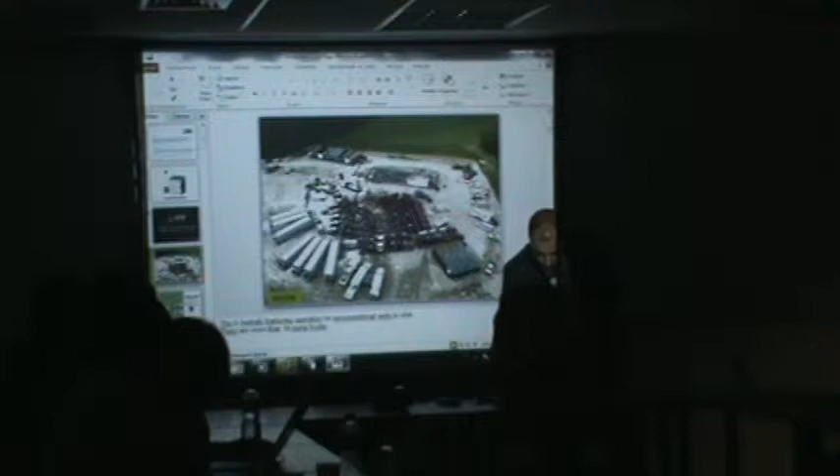So let's move on. This is a picture - I will turn on the lights just after this. This is a picture of unconventional operations. We don't have a drill rig here; this is the phase of fracturing. You can see these white trucks that carry water, and these red trucks that are the pressure pumps. Here is the well, and water is injected inside this well deep into the subsoil, and then the fracturing occurs. This is like a pool where you put the flow back of the well - the water that you injected. Part of this water stays in the subsoil, and part returns to the surface, so you have to collect and treat this water. This is the picture of an unconventional operation. In a few minutes I will talk about the comparison of conventional and unconventional operations, and I want to play a movie just to give an idea of what conventional operations mean.

This is available on the...

In order to maximize the production potential of the well, the shale formation will be hydraulically fractured.

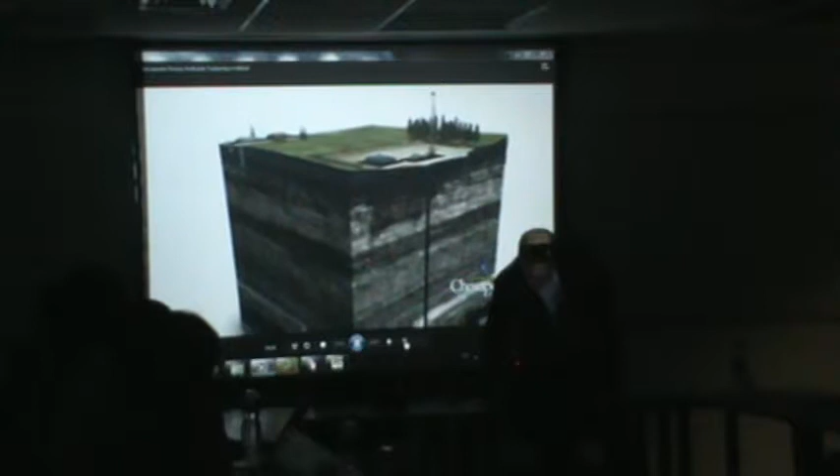Just so you know, I picked this up on the internet. This is a company that operates in the US, but I'm not doing any kind of endorsement here. This is available on the internet, and it's a good movie, very short.

In preparation for the fracturing process, the casing will be perforated in the horizontal portion of the well using tubing-conveyed perforating guns containing explosive charges.

The perforated intervals are spaced approximately 50 to 80 feet apart and create a connection between the production casing and the shale formation. With the initial perforating complete, the tubing and perforating guns are pulled to the surface, and the workover rig is replaced by a hydraulic fracturing crew consisting of a number of high-pressure pumps and blending equipment.

This equipment will pump a mixture of water and proppant, usually sand, through the newly created perforations in the production casing and into the shale formation.

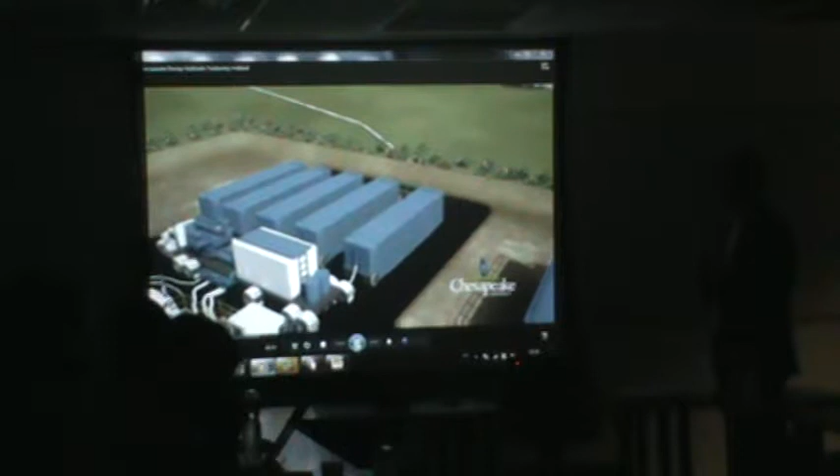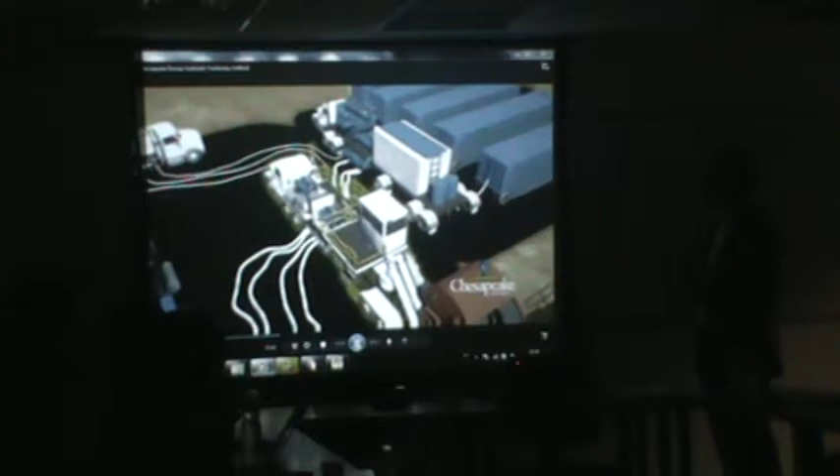First, water is passed from a water storage impoundment into the blue working tanks depicted on this location. The water is then pulled into a hydration unit, which provides the ability to gel the fluid before it is transferred to the blender. At the blender, proppant and a small amount of chemicals that aid in the fracturing process are added.

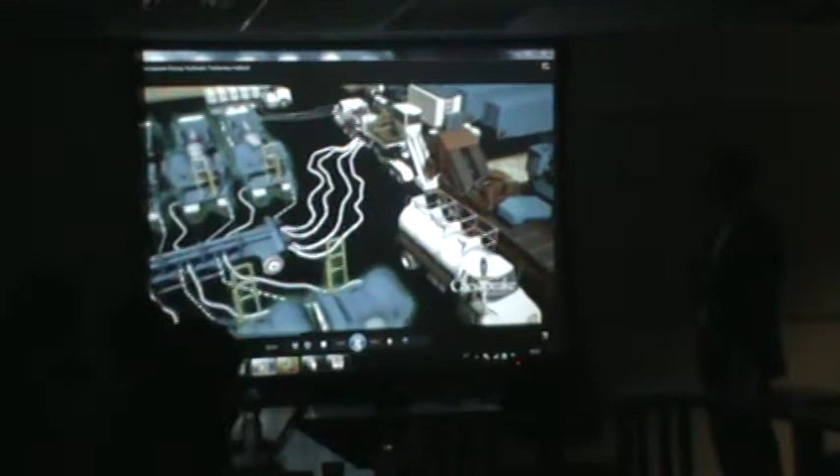The blender transfers the fluid and proppant mixture to the pump trucks through the low pressure side of the manifold. The fracturing pumps increase the pressure of the fluid, sending it back through the high pressure side of the manifold to the frac tree, where it enters the well.

The entire fracturing process is controlled from the treatment monitoring van.

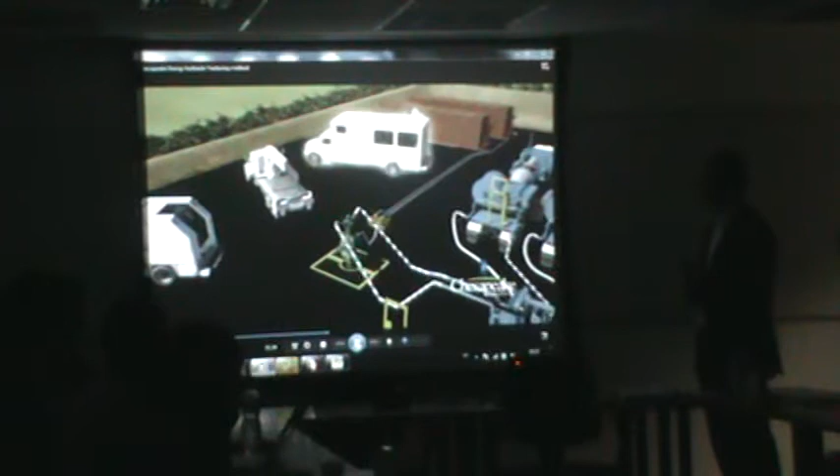When the fracturing fluid reaches the perforations, pressure builds until the shale formation fractures, allowing fluid to enter the formation. Additional fractures are created along natural zones of weakness in the shale. These fractures are contained within the shale formation, well below the ground.

After an initial stage of fluid called the pad is pumped to create a fracture area, proppant is added to the fluid and is distributed throughout the newly created fracture network.

At the conclusion of the fracturing treatment, the proppant allows the fractures to remain open so that the natural gas can flow into the production casing and to the surface. This completes the first of several stages in the fracturing process.

This process is repeated by lowering and pumping down an isolation plug and perforating guns into the wellbore to complete the next stage of fracturing.

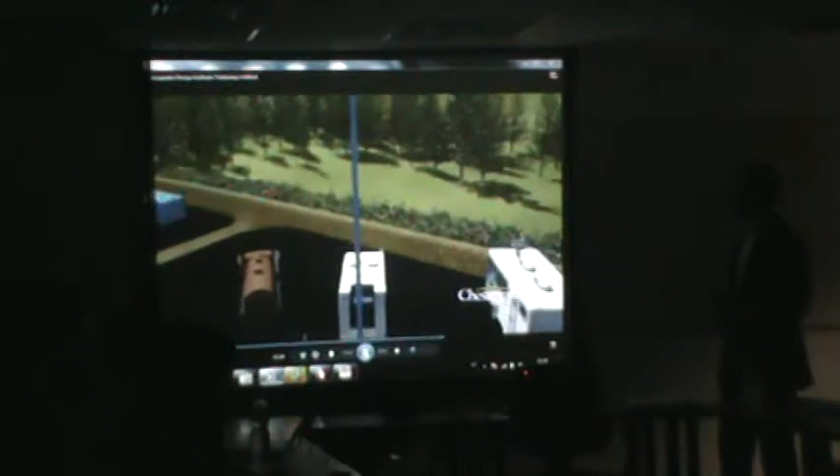This time, the tools are conveyed into the well by a wireline unit, which allows the fracturing process to proceed much faster and more efficiently. A lubricator is used to control the pressure of the well while the operation is taking place.

On the bottom of the perforating gun, a composite bridge plug is placed to isolate the newly fractured zone. This ensures that the subsequent fracturing treatment is contained in the current zone.

The perforating gun is again fired at roughly 50 to 80 foot intervals, creating a connection between the production casing and the shale formation. The fracturing process is then repeated until all of the stages are completed. A typical shale well has approximately 8 to 12 stages of fracturing.

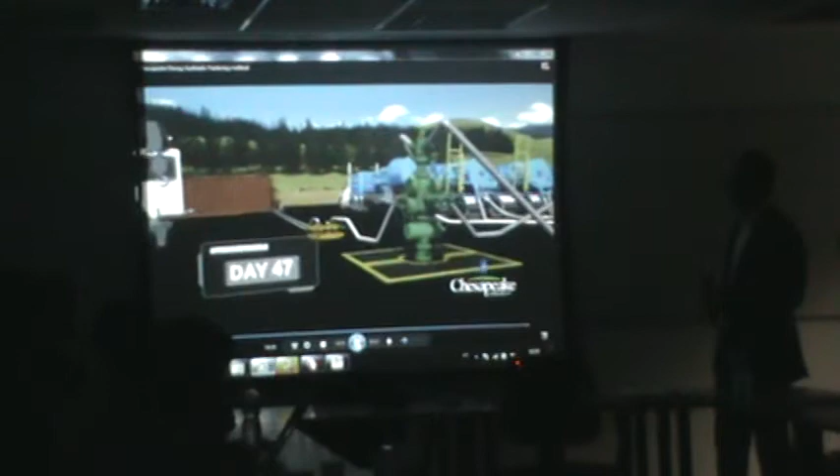At the conclusion of the fracturing operations, the isolation plugs are removed from the well and production can start. The produced fluids are diverted through a flowback manifold into storage tanks. The fluids are then recycled or disposed of according to state and federal regulations.

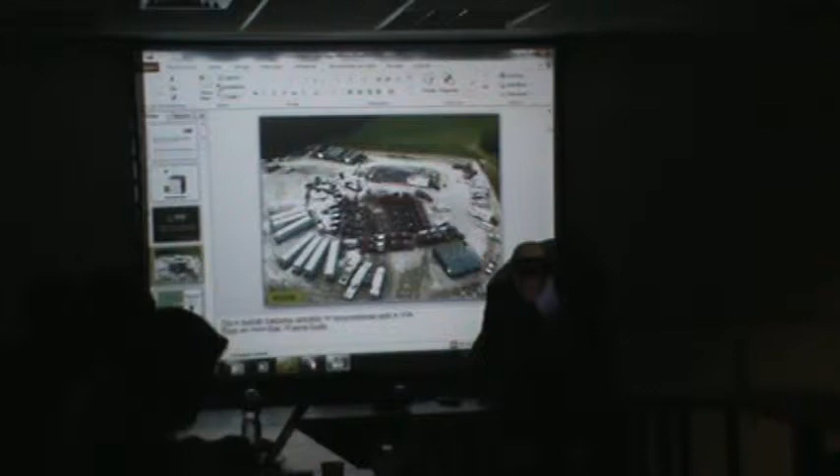Well, we will be back to these operational issues, but I want to tell you how ANP works.

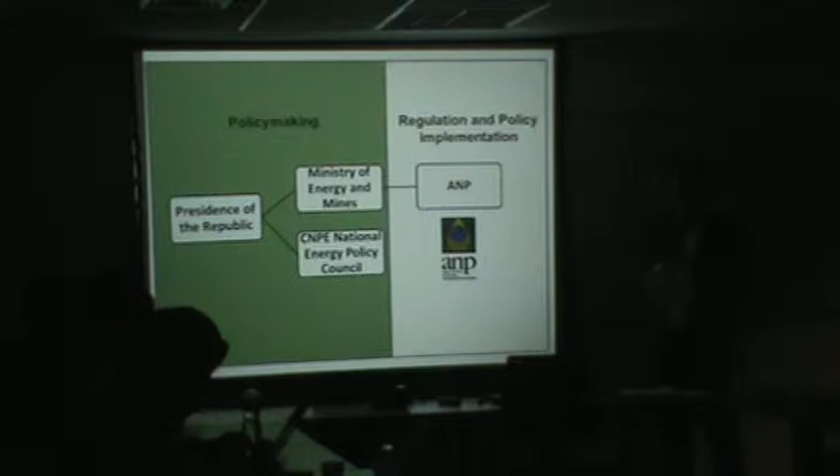ANP was created in 1997 by the law 9478, and thank you.

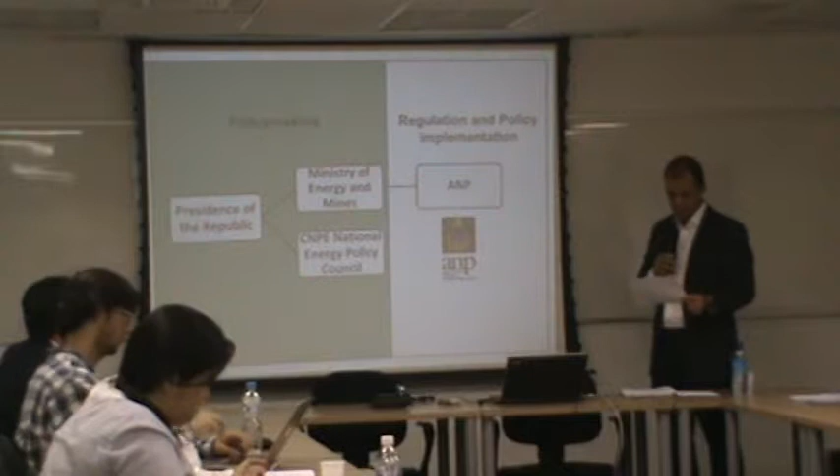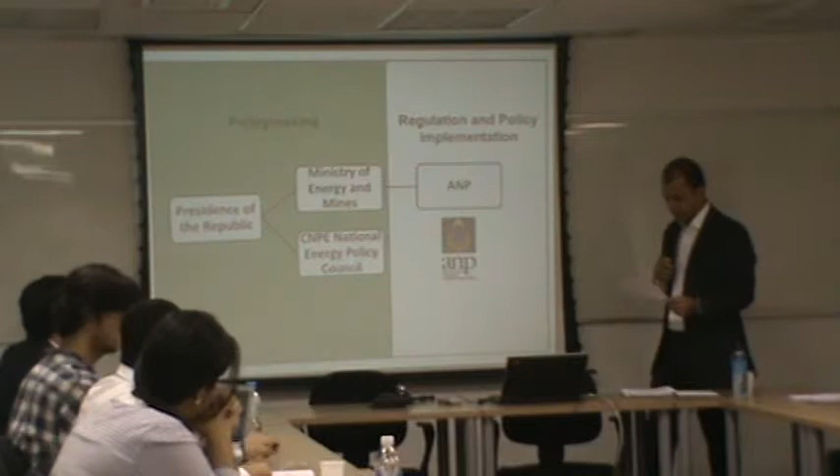In the structure of ANP is the Brazilian regulatory agency for oil, gas, and biofuels. In the structure of the executive branch, ANP is linked to the Ministry of Mines and Energy and the President of the Republic. We are also related to the National Council for Energy Policy, and our activities go from the wellhead to the gas station, and our main duties are to hire, regulate and supervise the activities of the industry.

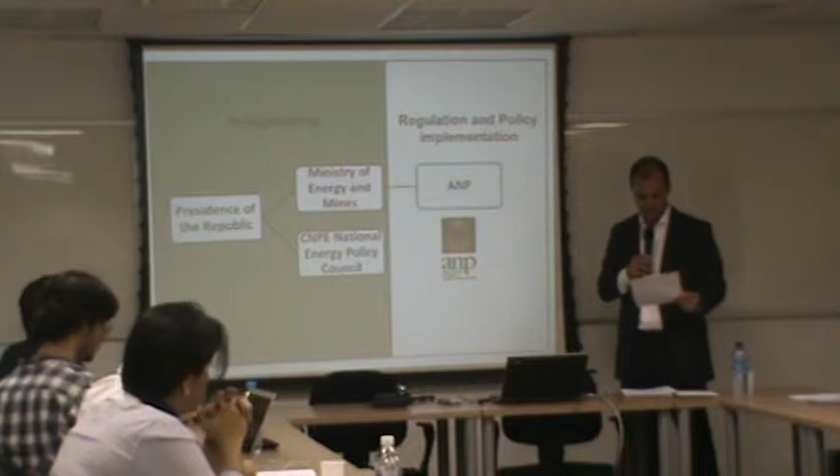One of our important departments is the Block Definition Superintendence. There, geologists and geophysicists are studying our sedimentary basins.

The studies that we are doing show that more than 60% of our gas potential is at onshore new frontiers. What does it mean? New frontier basins are basins where there have been few exploratory activities until now.

The 12th bid round will happen in October, and we will have 6 sedimentary basins on this bid offer. That's one of the reasons why ANP is going to promote this bid round. Our country has a very limited knowledge of many other onshore sedimentary basins. We need to know more.

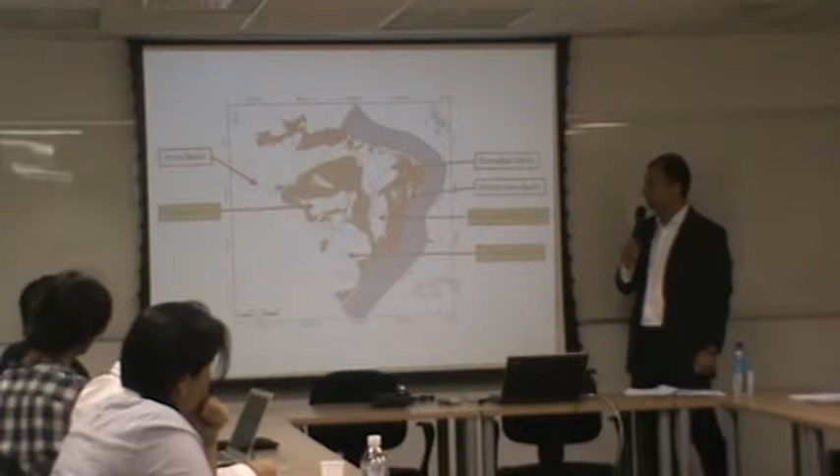The 12th bid round next October will offer onshore blocks with potential for natural gas containing conventional and unconventional resources. As you can see on this picture, there are 6 onshore basins. The yellow basins here, the Parecis basin, Paraná basin, and São Francisco basin, and also the Recôncavo basin, we believe there are opportunities for unconventional gas too. The other, Parnaíba basin and Acre basin, we believe there are opportunities more for conventional, but we can have unconventional in all of those basins. We believe that in the yellow ones, the unconventional will be more present.

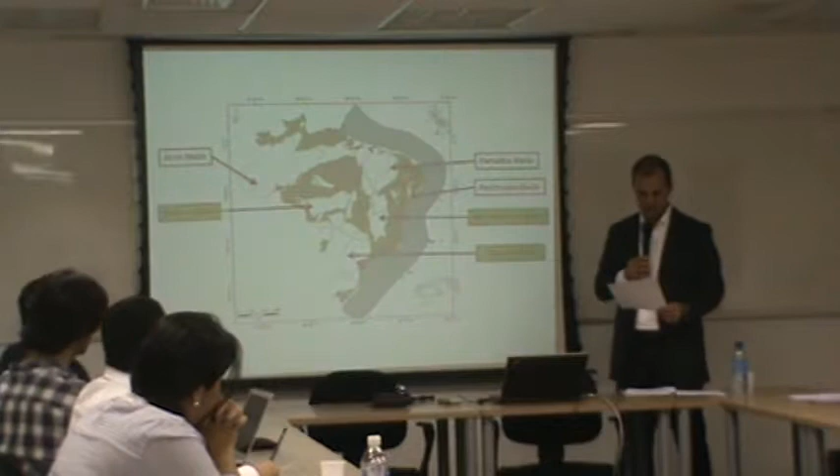The main features of the concession agreement for exploration and production of oil and gas in Brazil are related to Article 177 of our national constitution. This article determined as monopolies of the Federal Union the activities of prospecting, refining, importing, exporting, shipping, and shipping oil derivatives. Article 6 of Law 9,478 from 1997, in paragraph 13, defines blocks as a part of a sedimentary basin formed by a vertical prism of indeterminate depth with a polygonal surface defined by the geographic coordinates of its vertices.

I will be back to this definition in a few minutes.

There is a difference between these 2 bid rounds because of the contract format. This one will be the concession contract format, and the pre-salt will be the first production sharing contract. That is a different kind of bid round contract.

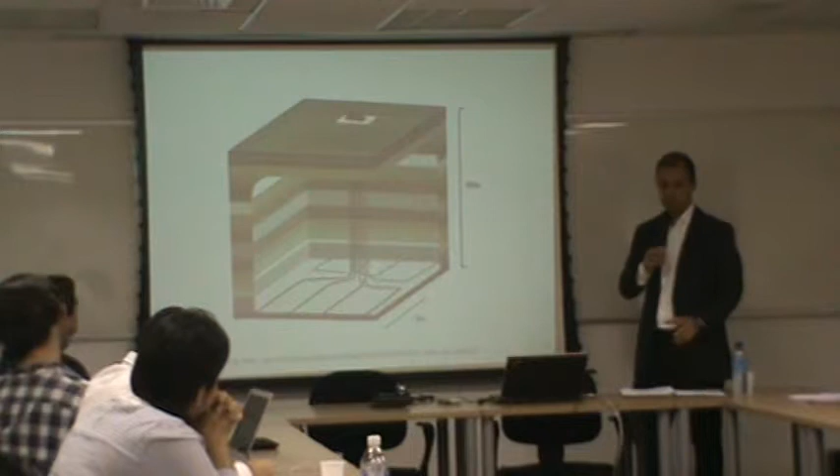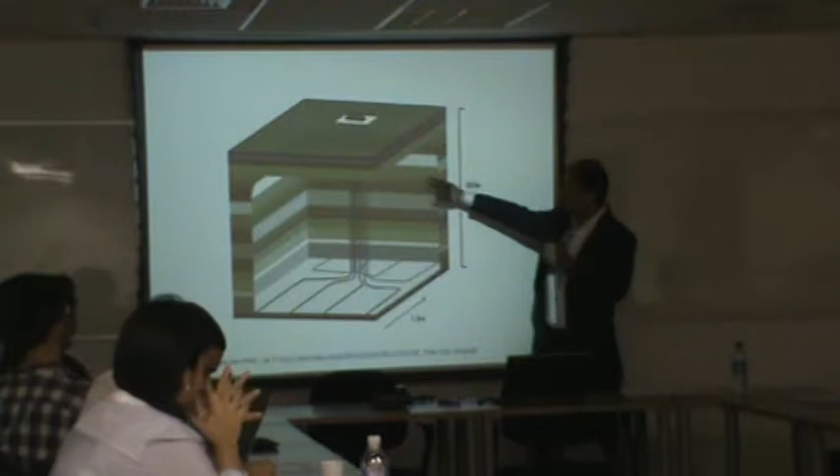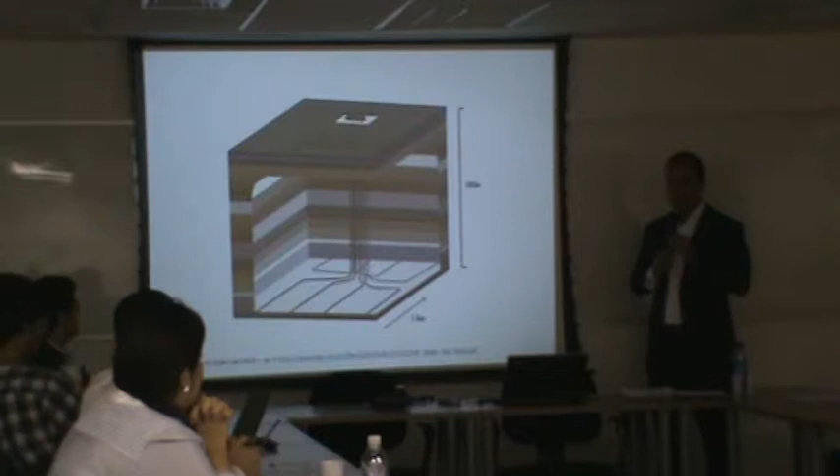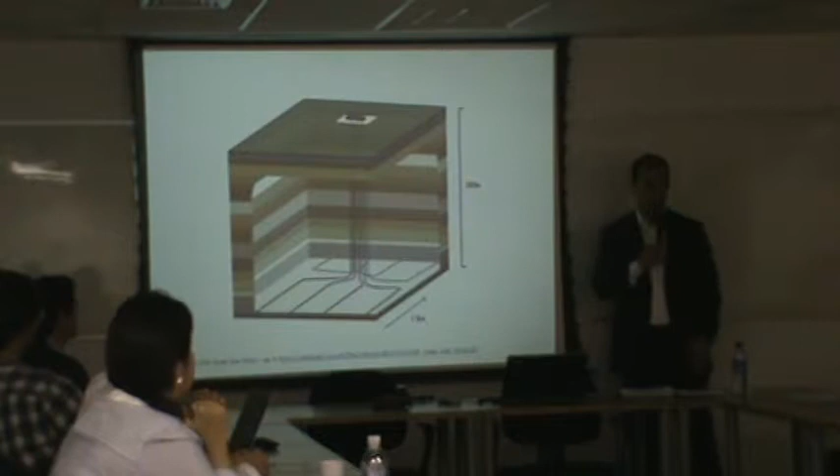What I told you about the block that is bid is that it is defined by the vertices on the surface, and the depth is indeterminate in our law. There is a difference from other countries because, for example, in the US, in some states, you have a limit of depth for exploration. In Brazil, you don't have this limit. Also, there is a difference about the property of the resources. In Brazil, everything that is under the surface is property of the federal union, while in the US and other countries, for example, the property belongs to the landowner.

Let's talk about the regulations for operational safety and environment. Our superintendence is very new; we were formed last year in June. These regulations are for the coordination of safety operations, and we have 3 major resolutions. The first is management of safety operations for offshore units, a risk-based resolution. The other is resolution number 2 of 2010, management of safety operations for onshore fields in production. And resolution number 6 of 2011, the regulation for safety operations for onshore pipelines.

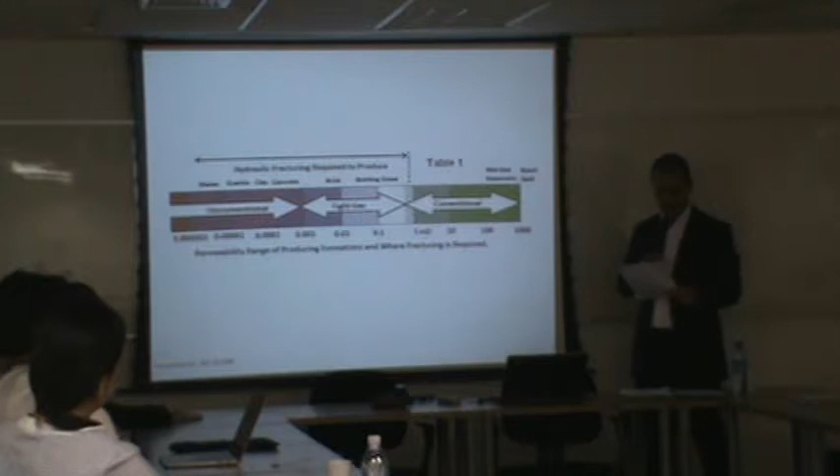Gas and oil productive shales have natural fractures and microfractures, a characteristic missing from high clay content shales that serve as natural seals and barriers, with permeability so low that they approach the permeability of steel pipe. Natural barriers are the rock seals that have held the gas, oil, and salt water in the reservoir for millions of years. What does that mean?

In conventional exploration, the shale is a seal. Below the shale, you have a source rock with oil and gas, and it is trapped because there is, for example, a layer of shale over the source rock. But the biggest difference for unconventional exploration is that researchers discovered that you can frack the shale and release the gas inside this rock.

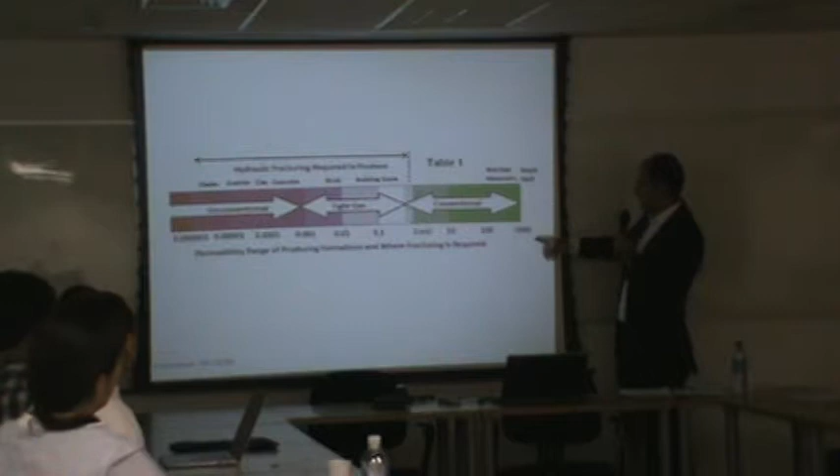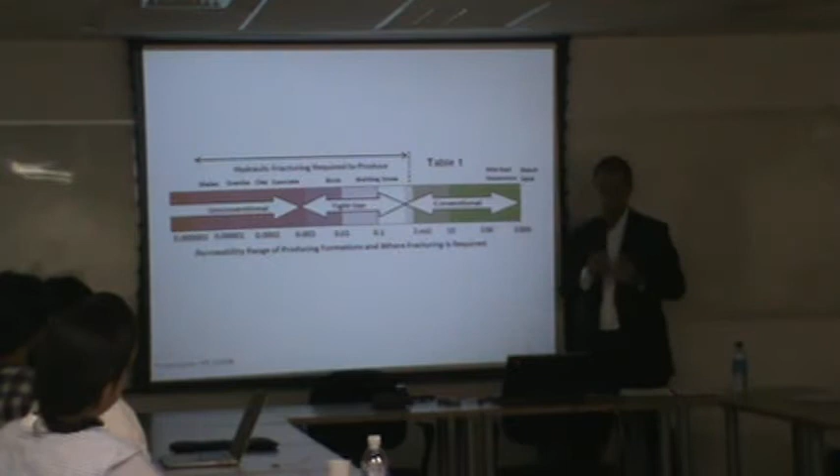This table measures the permeability of the rock. Sand has a permeability of 1,000 millidarcy - darcy is the unit for permeability. Going down in permeability, you find, for example, building stone, brick, concrete, clay, granite, and shales in this order. So you can see that you are approximately trying to drill steel and make porosity, make permeability in the steel. That's why you need a lot of pressure to do these fractures, and why it's so important to use this technology to release the gas in this kind of rock.

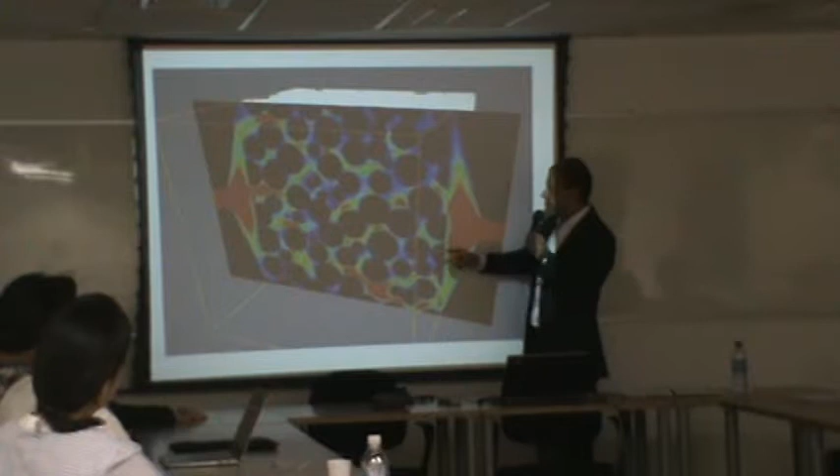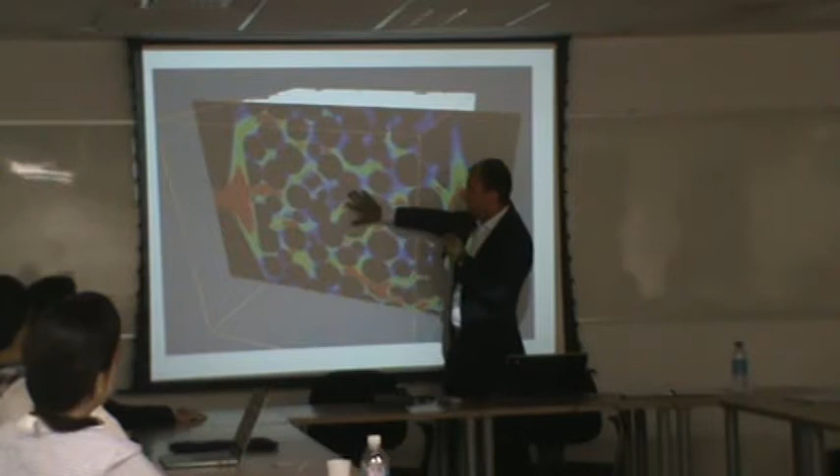This is just to help explain - the black regions here are mineral grains. Here, for example, you have a pore that is not connected with other pores, so it's an isolated pore. This pore here is connected, making a channel. If you put fluid in this rock sample in the laboratory, the fluid will pass through because this rock has permeability. Permeability is, in a few words, the channels in the rock. The shale doesn't have these channels, so you have to frack the rock to artificially create them.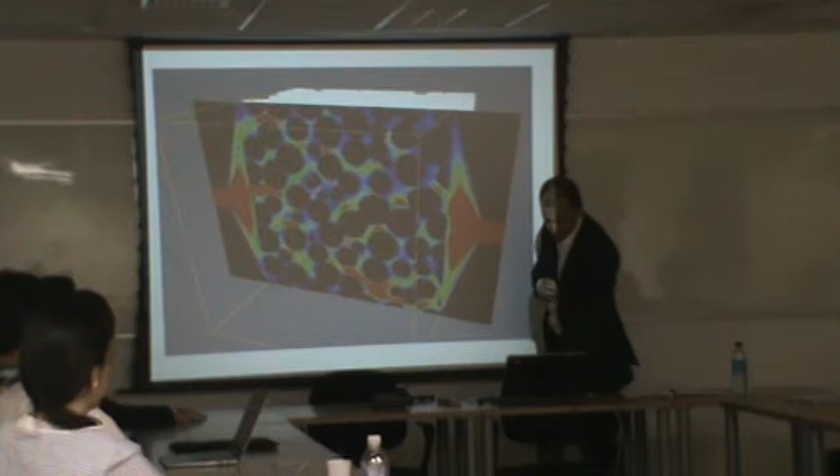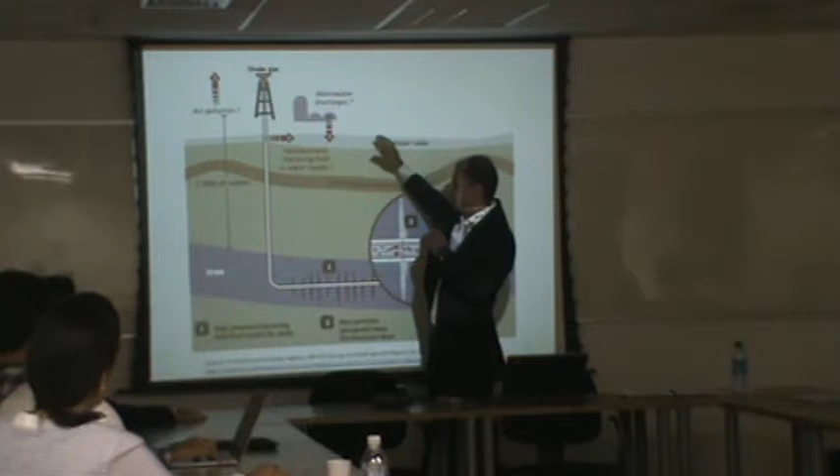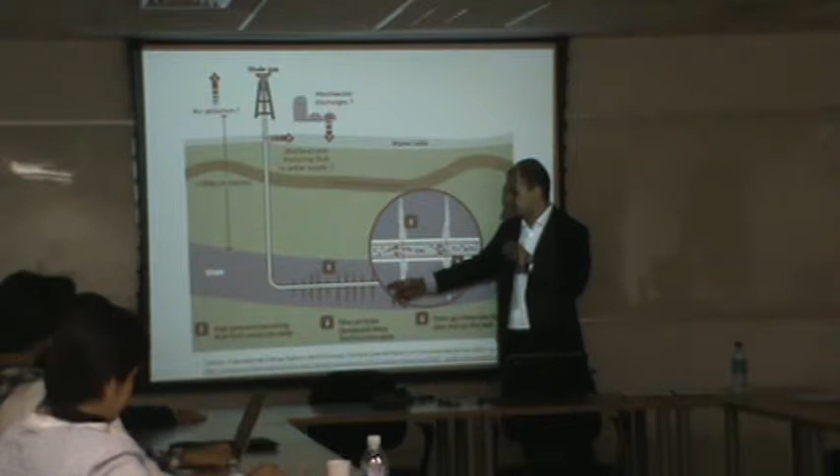So, how do you extract natural gas from shale rocks? As you saw in the movie, you have to drill a well. This is an onshore exploration block. You drill the well vertically, then do part of the well in a horizontal position, because the shale layers are normally very extensive - it's easy to do that because with one horizontal well you will have a larger area for exploring and extracting the gas.

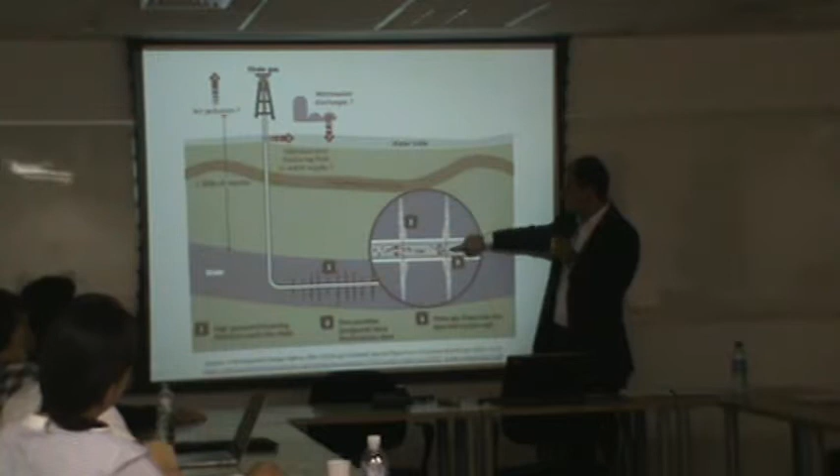Then you do the fractures as you saw in the movie, and these white points here are the proppant - small grains of, for example, sand or ceramic - that after you release the pressure of the fracking, will keep the fractures open. If you don't have proppant, the fracture will close because of the pressure. Then the gas that was trapped in the rock will be released into these fractures, and then flow to the surface.

So which reservoirs do we have here in Brazil? There is a lot of variation. I can say, for example, in the São Francisco Basin, 4,000 meters, but it varies.

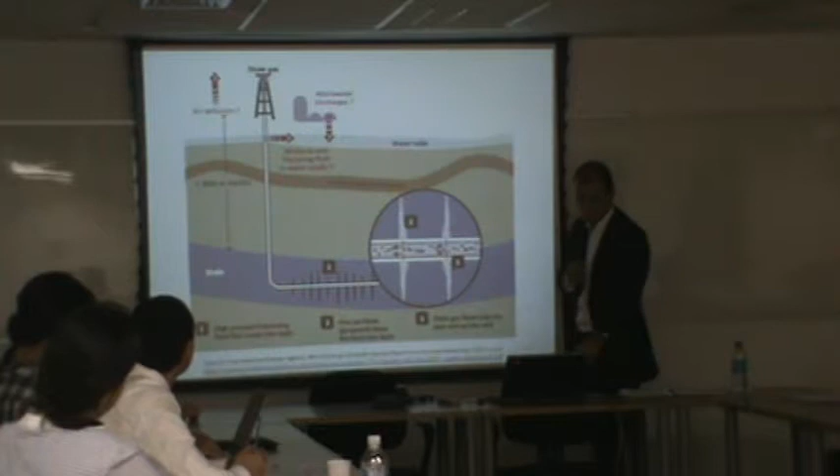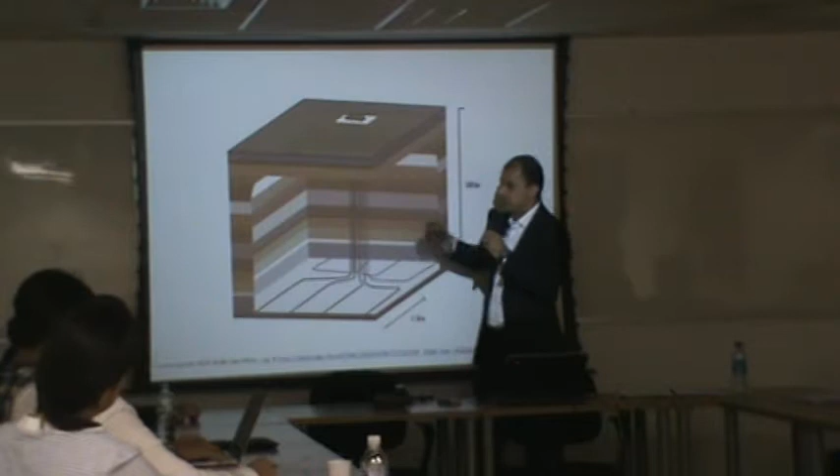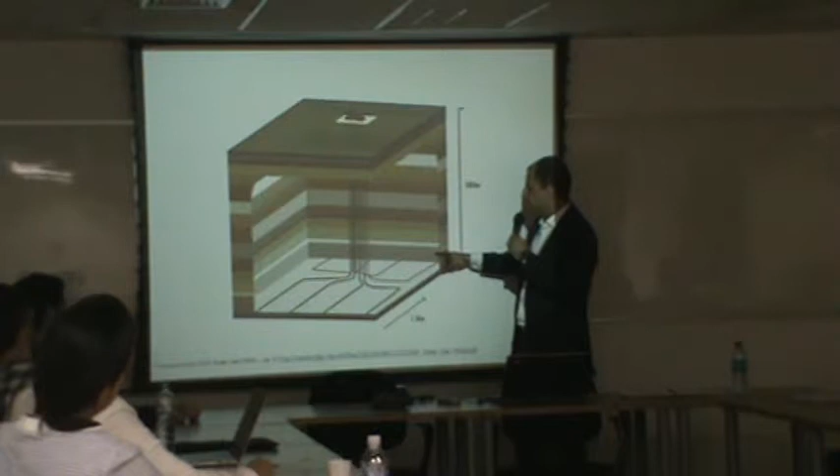Again, this picture of the block - another important piece of information here is the distribution of the wells. In an unconventional exploration block, you have the wellheads grouped in the same place. This reduces the footprint of the activities. The strategy is to drill vertical wells, and then on the layer where the shale is found, you distribute these wells as horizontal wells.

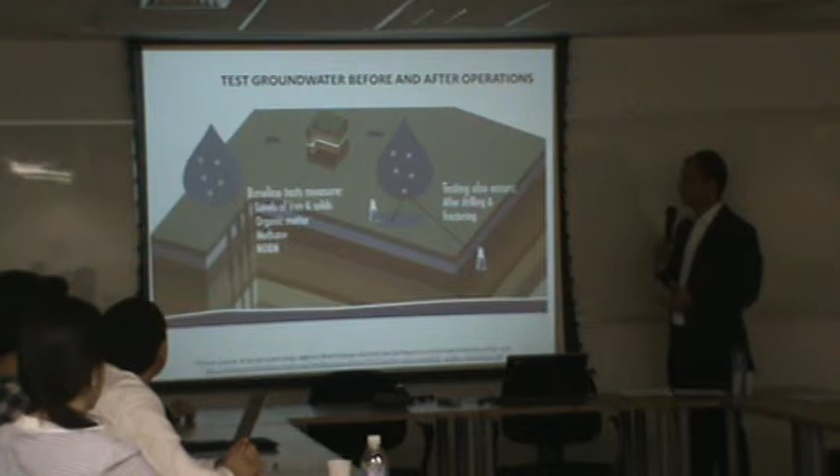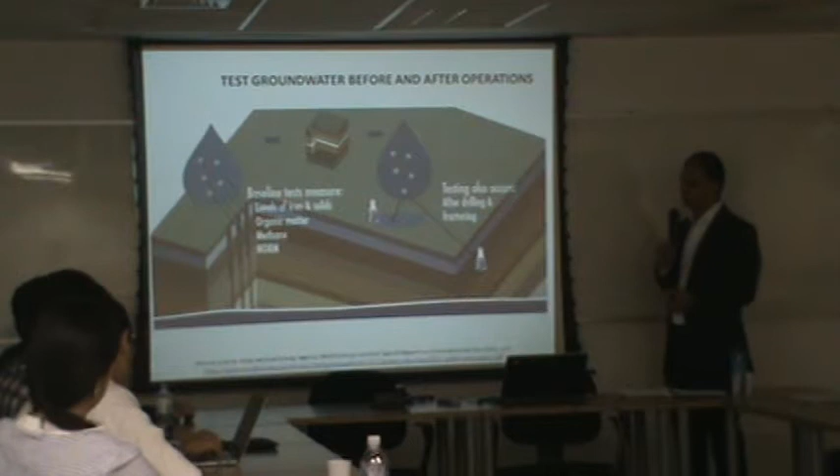In the conventional operations that pass through our superintendence, we ask for water analysis before the conventional fracturing operations. When the operations are finished, for example 2 or 3 months after the start of drilling and fracturing, we tell the operator: please give us another sample of water, another test of this water. And you can put this in the contract.

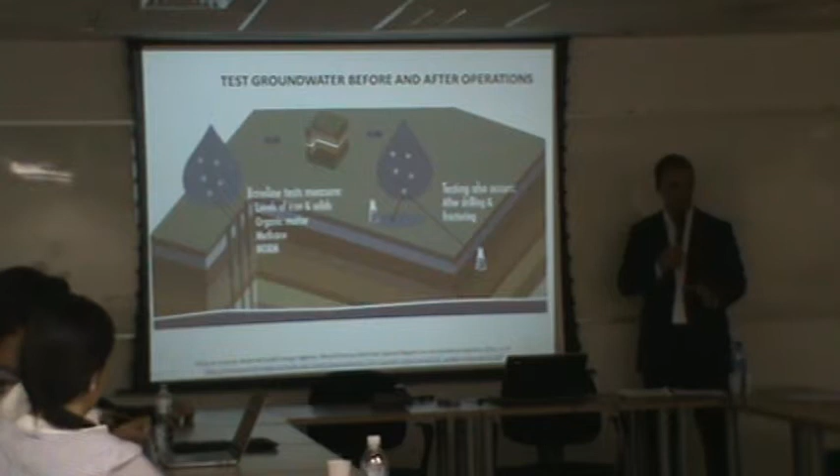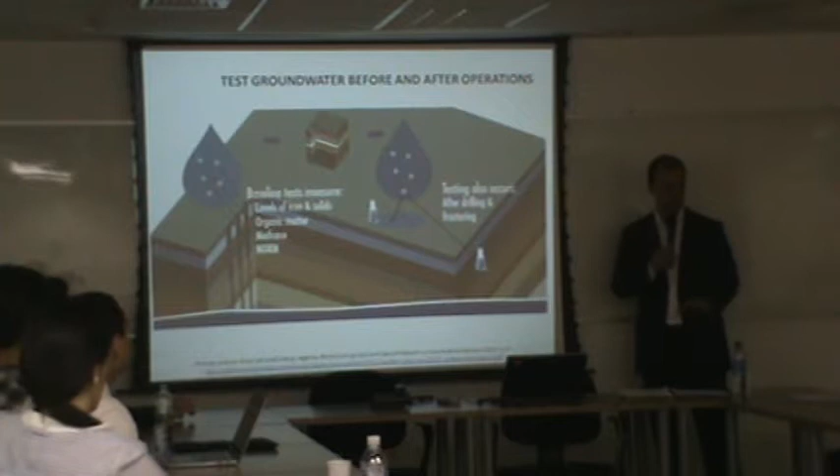He will probably stay in that area extracting gas or oil for 20 years. So you can ask them, for example every 6 months, to give you another test of the water, just to guarantee that the conditions are the same as when the operations started.

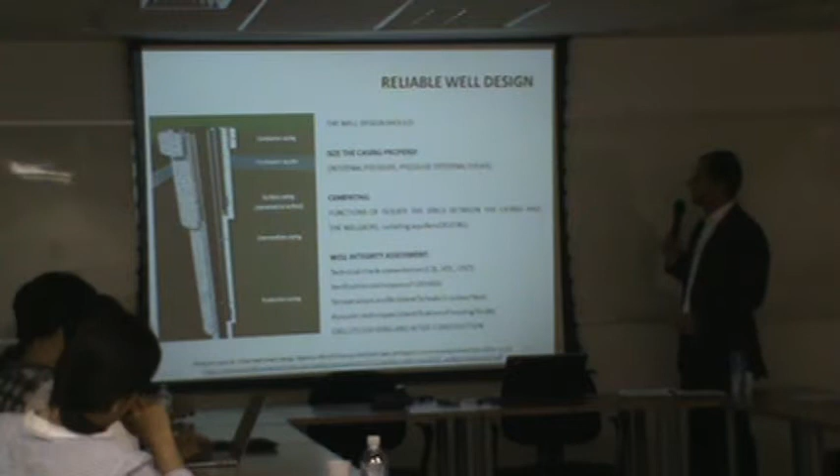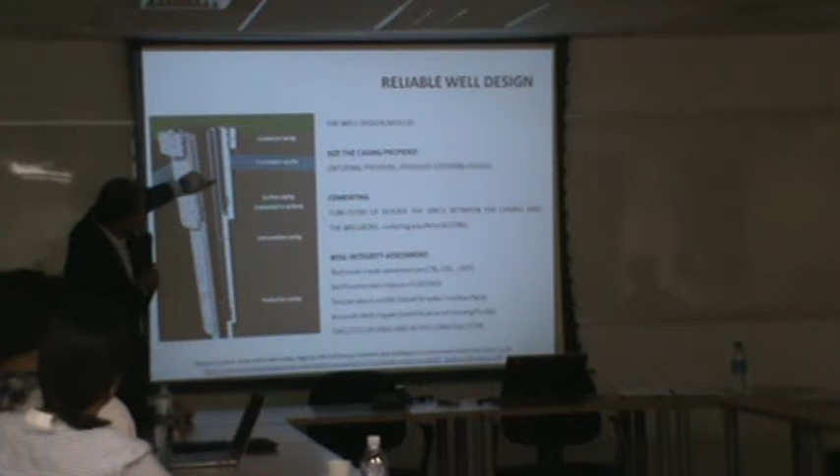Another way to make the risks acceptable is reliable well design. If you are not familiar with a petroleum well, it's like a telescope. Here's the first casing, the second casing is inside the first, and then the third casing, the production casing, is inside the other two.

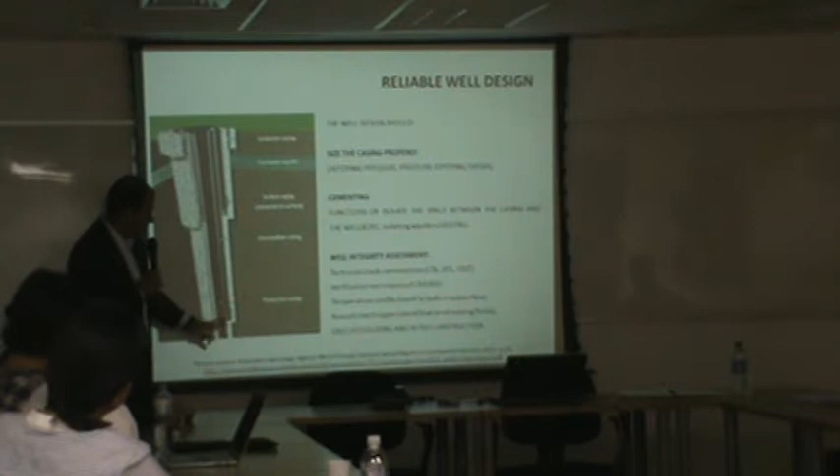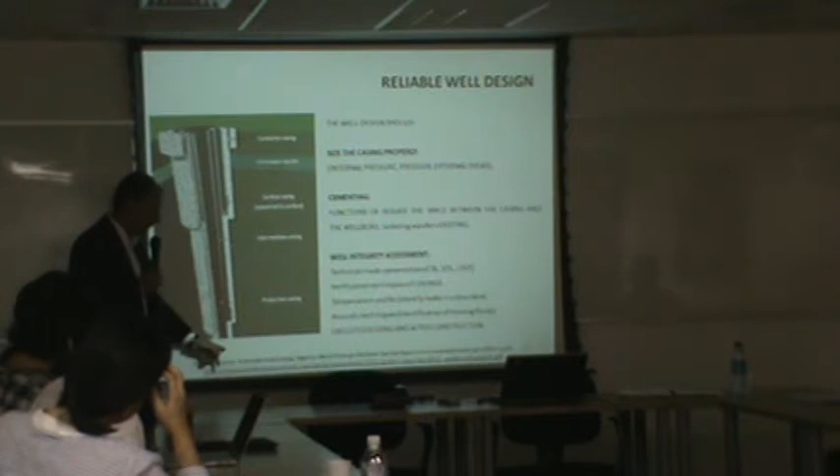Between these casings you have cement, and the function of the cement is to isolate the well. If you have a leak here, you have to imagine there is a lot of pressure at the bottom of the hole. So if you have a fluid that wants to escape, the cement will block the way for the fluid to escape to the surface.

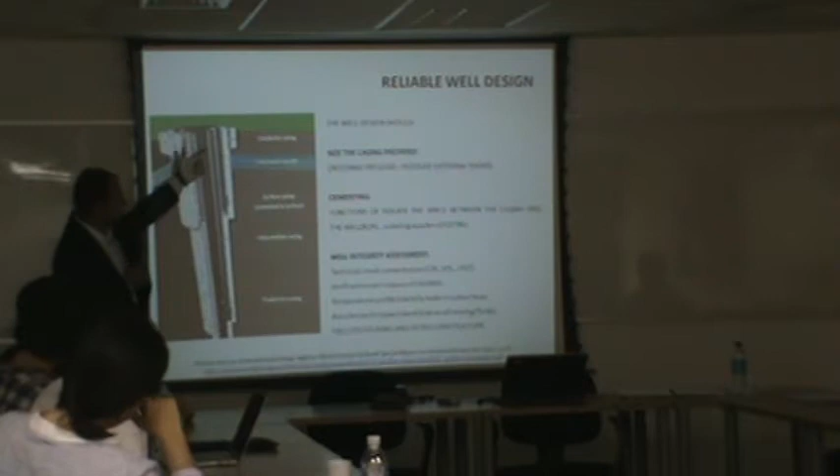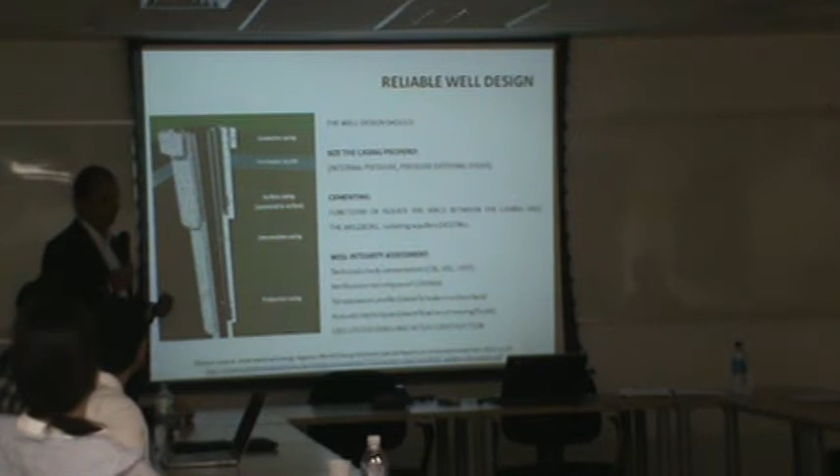So the cement operations have some kind of tests that you do when you drill the well. First you drill the well, then you put in the steel casings, and then you do the cement job. You have very rigorous tests, and more than the data of these tests, what we require is the report of a technician who analyzes the data and says that the cementation is trustable. This is very important to do.

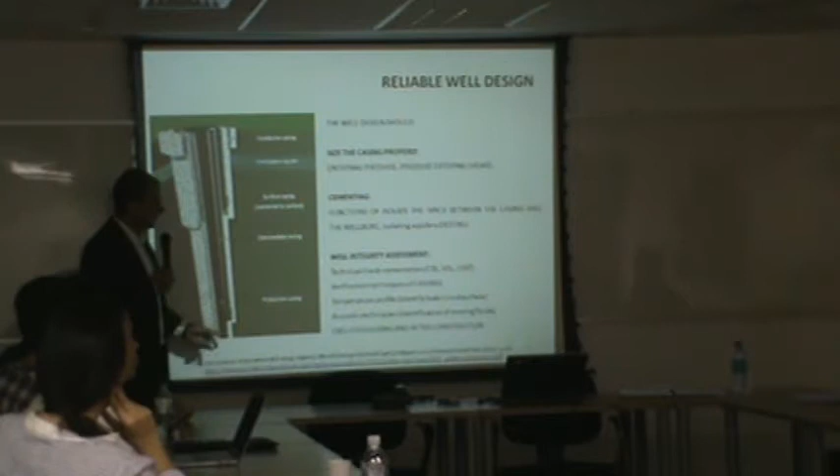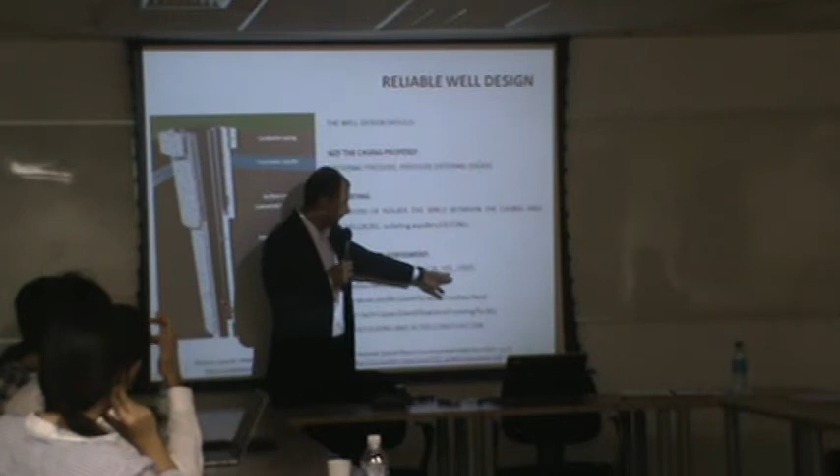And also the well integrity assessment. What does it mean? You check the cementation, as I told you, using technical tests called CBL, VDL, and others. You also have verification of the casings, the steel part of the well.

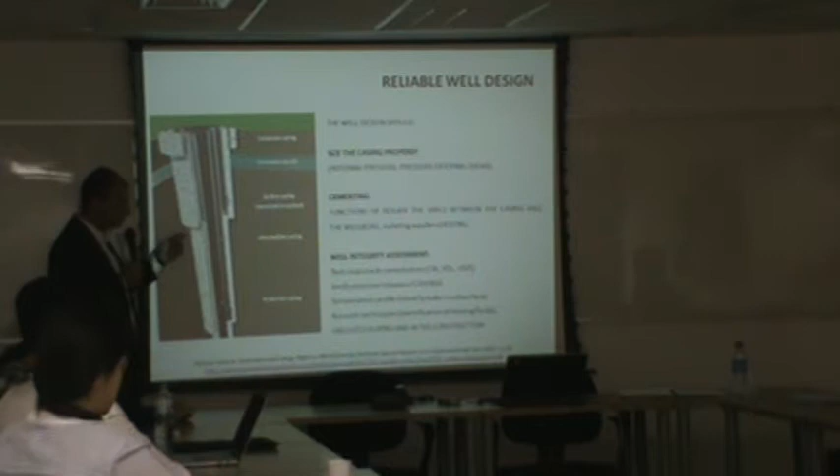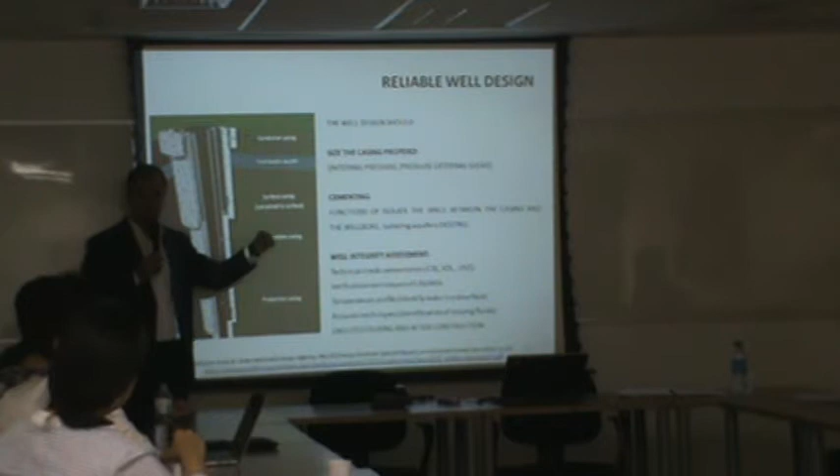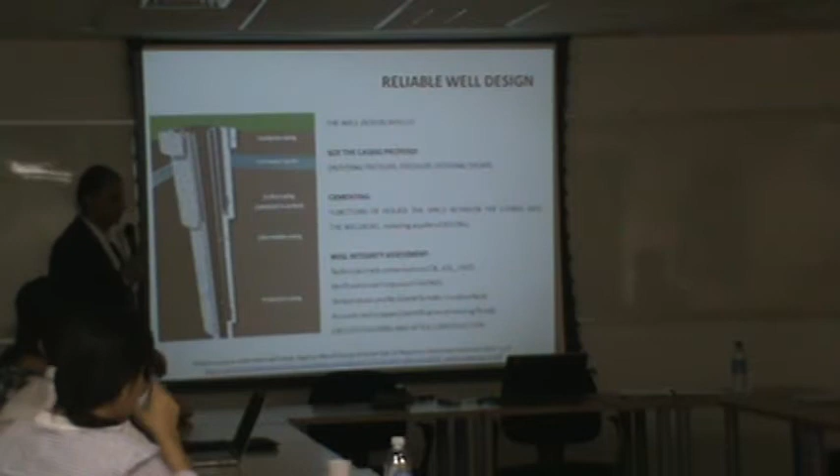You can run a temperature profile, because the temperature through the well is steady — it increases as depth increases. But if you have a leak, you will see variation in this temperature profile, so it's a way to identify a leak in your well. There are also acoustic techniques, and all these tests can be executed during and after construction. So there are a lot of techniques to guarantee that your well is reliable.

And for all the equipment, we have some critical elements, and in our regulations we ask the operators to identify in their procedures what are the critical elements for operational safety.

For example, that fracking pump works with very high pressure, so the operator has to show us that they have systems against overpressure, for example one electronic and other mechanic. Also at the wellhead, you have to install relief valves, because if you have overpressure, the relief valves open and release the pressure, so you don't have an accident. And also an emergency shutdown button, for example. These are only examples of critical elements for safety.